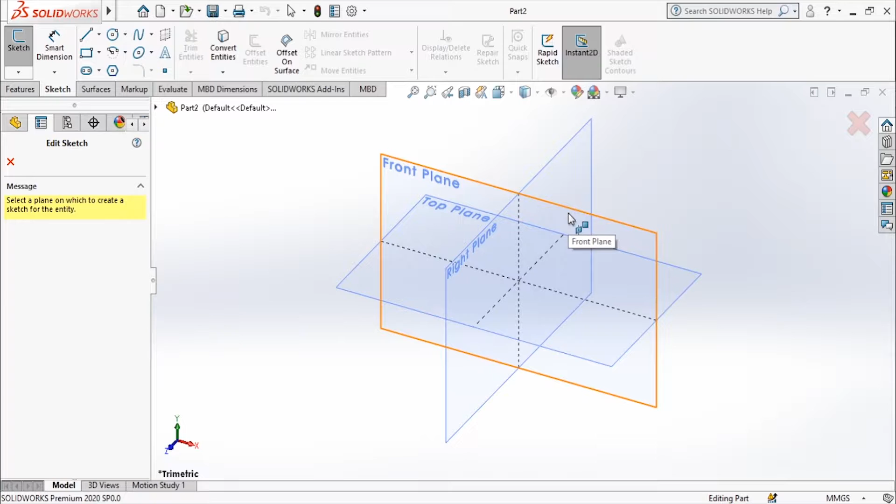Welcome back. In this video, we will see how to make this universal coupling in SolidWorks, and the drawing details are given here. And using this, we'll make an assembly in SolidWorks. So we'll go to new part, create first one sketch. First, I'm going to create on the front plane.

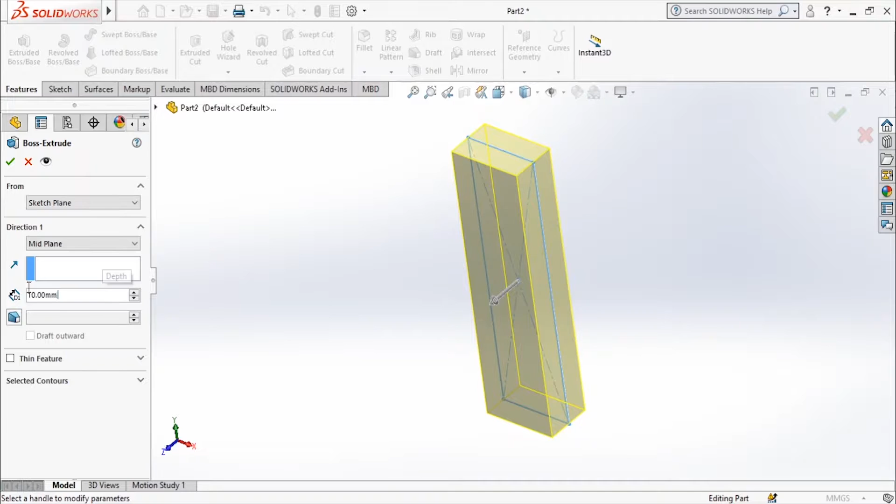First, I'm going to create this part, this center part that is 16 thickness. So first, I'm going to make a center point rectangle. Its width is 16 and its height is 57. I'll exit the sketch and I'm going to use the extrude. And I will use the mid plane. And the total distance is 84, and I'll exit from this.

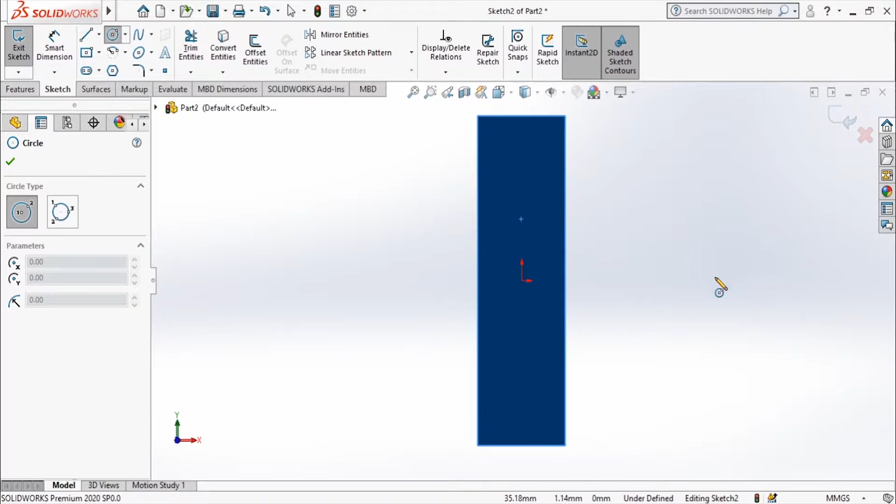And I'm going to choose this plane and I'm going to create a new sketch again. I'll make this profile and I'm going to extrude it at a distance of 84 minus 56 by 2, that is 14. So first I'm going to create a small circle. Small circle is of diameter 16 and outer circle, that is the arc, is of radius 20. I'll make the full circle itself. Later I'm going to trim it.

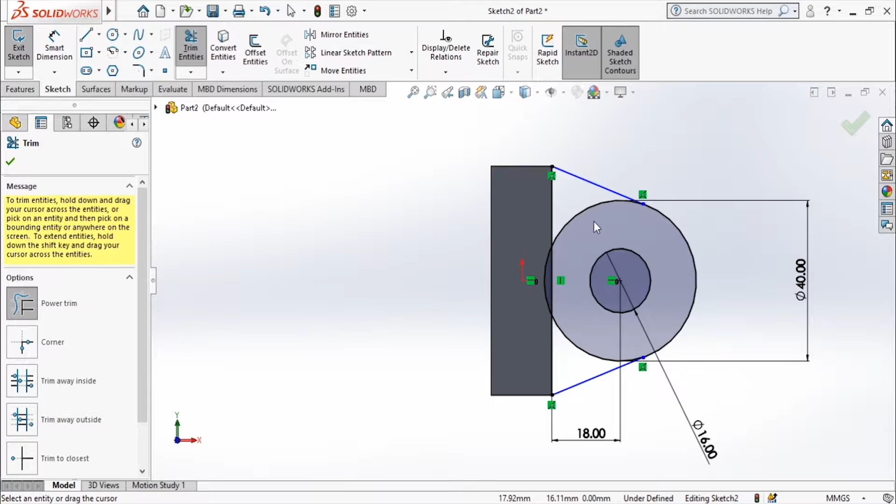It is 16 in dia and this one is 40 because radius itself is 20, and the distance from this end to this circle center is given as 18, and I'll make sure that these two are horizontal. Yeah, and now it is fully defined. I'll add the other line, that is this line, and again this, and now I'll use the trim option. I'll make sure that these two are tangent. Similarly here also.

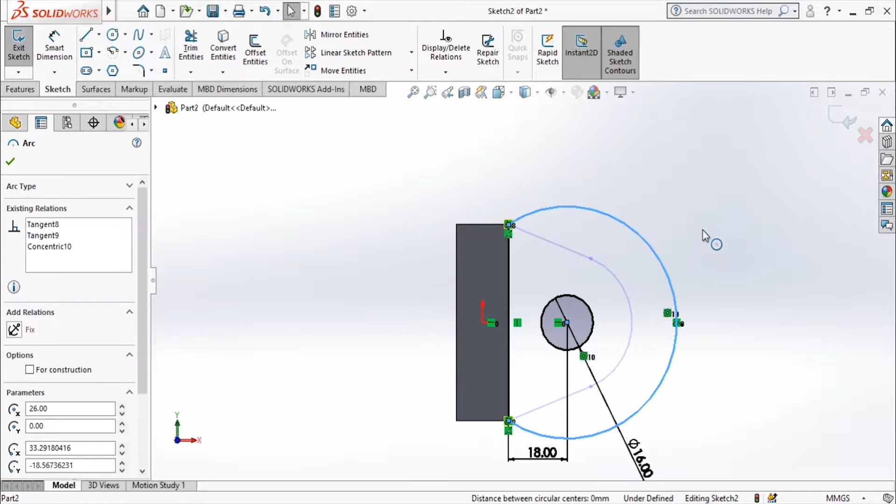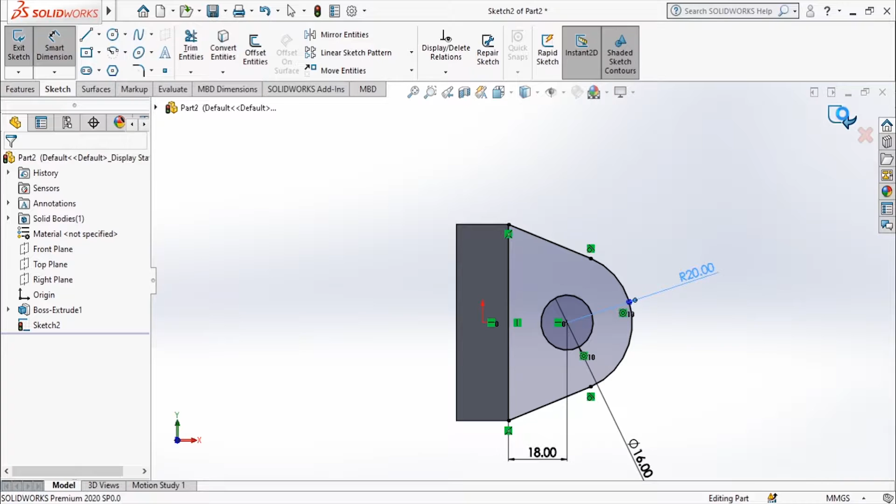And I'll add the dimension for this one. It has been deleted. This one is of radius 20. Yeah. And now it is fully defined. We'll exit the sketch and we'll extrude it. I'll extrude it in the opposite direction through a distance of 84 minus 56 by 2. We are dividing by 2, so it will be 14.

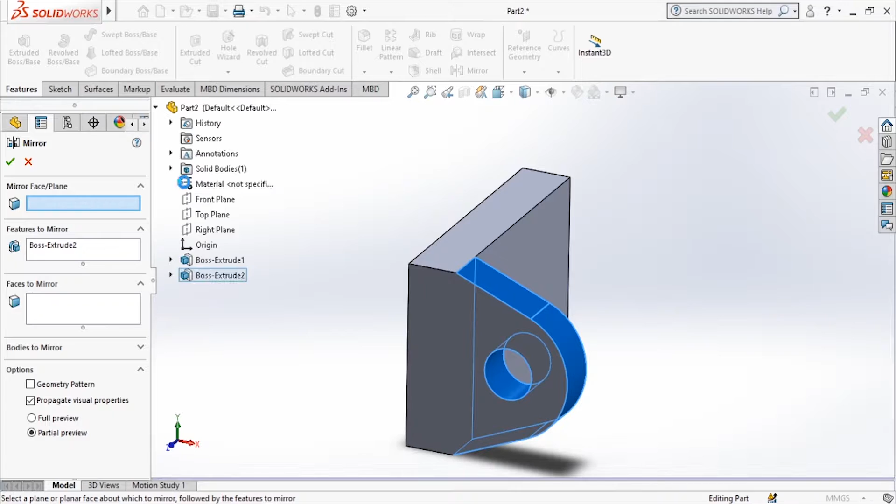And I'm going to mirror this on the other side now itself. So I'm going to choose this extrude, and I'm going to use the mirror option, and I'm going to expand this tree and choose the proper plane about which I need to mirror it. And now I'll choose this plane and I'm going to create a new sketch.

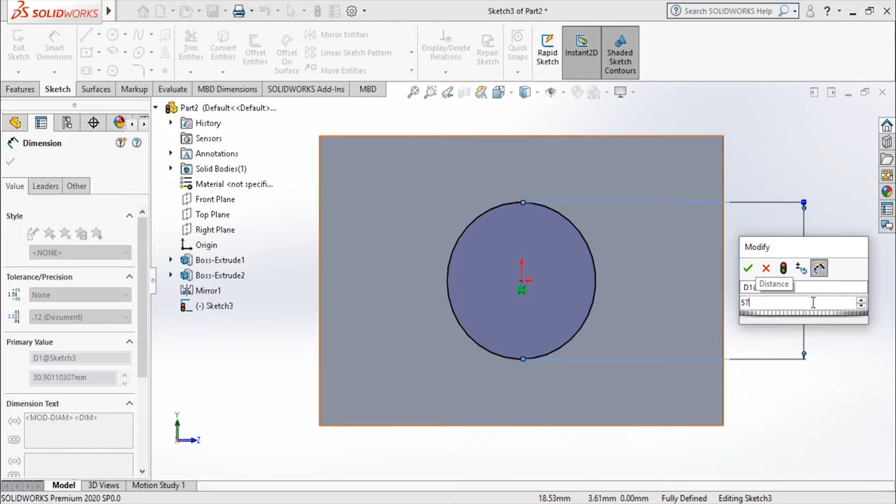First, I'm going to create only this outer circle which is of diameter 57 and extrude it at a distance of 38 mm. And later, I'm going to use the 30 mm to cut the through hole, because if I make this 30 mm and cut it, it will not be there properly, only till this surface. Again I need to draw the profile, so we'll just do only the 57 diameter circle and then extrude it, and later we'll cut it. So this is 57 fully defined, and exit the sketch, and I'll extrude it at a distance of 38.

And now I'm going to select this plane and create a sketch to create a through hole. So I'm going to draw a circle. Now the diameter is 30, and I'll exit the sketch. And now I am going to use the option extrude cut. I'm going to cut through all. You can see through all now.

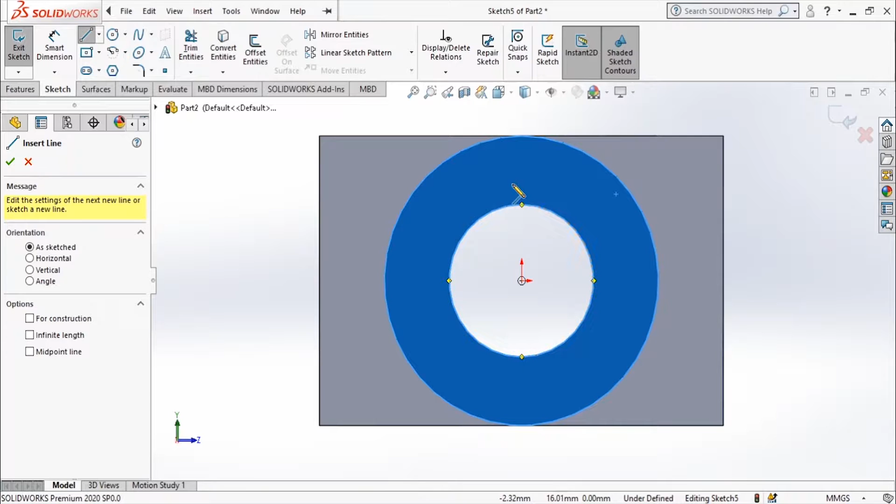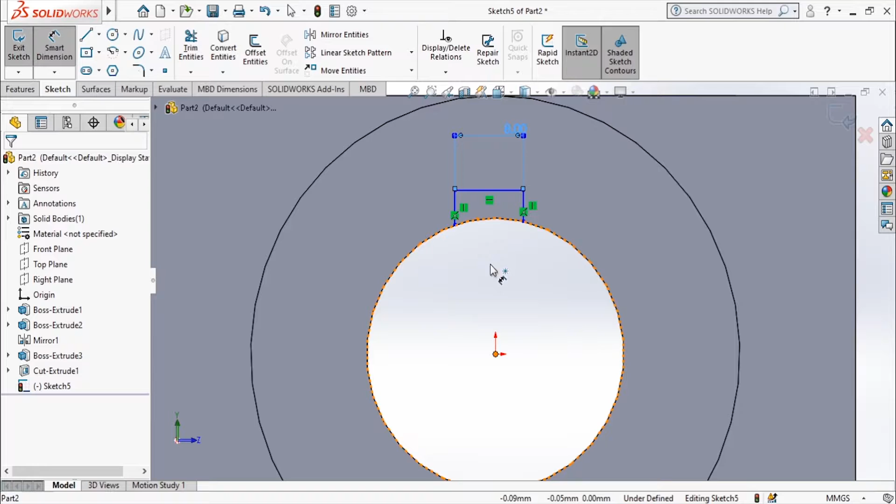And now I'm going to provide a keyway hole which is of 8 into 3.5. So I'm going to choose this plane and create a new sketch again. I'm going to use the line tool itself. And I'll add the dimensions for this one now. This one is 8 mm. The height is 3.5. But I need to make sure that these two are equal. So it is 4.

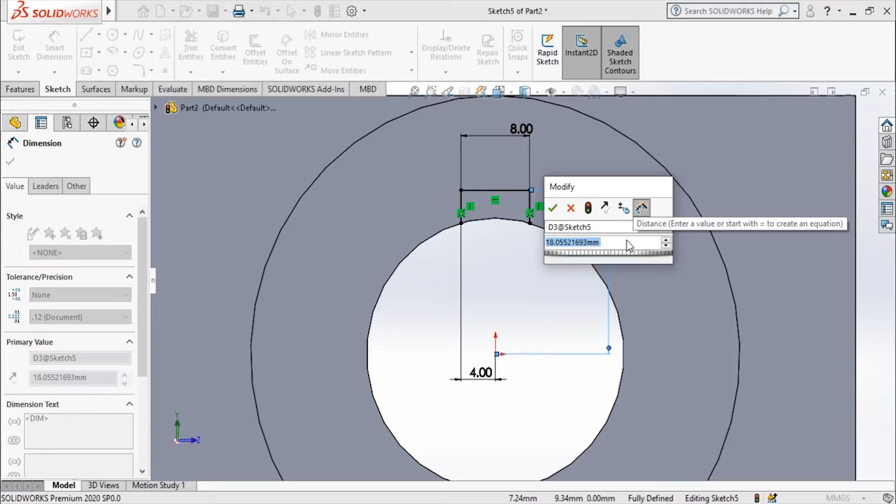So this height will be the radius of the circle plus 3.5. So radius of the inner circle is 15, since the diameter is 30. So 15 plus 3.5, that is 18.5. Okay, and now it is fully defined. It is not a closed profile, so we need to project this circle. So I'm going to use the convert entities. Yeah, and now it's projected, and now I'll trim this excess one.

And the profile is a closed profile, and I will exit the sketching mode, and I'm going to use the extrude cut again, but here also I'm going to use through all. And now you can see the keyway has been made, and we are done with the fork. Next one we'll go with the center. We will save this part.

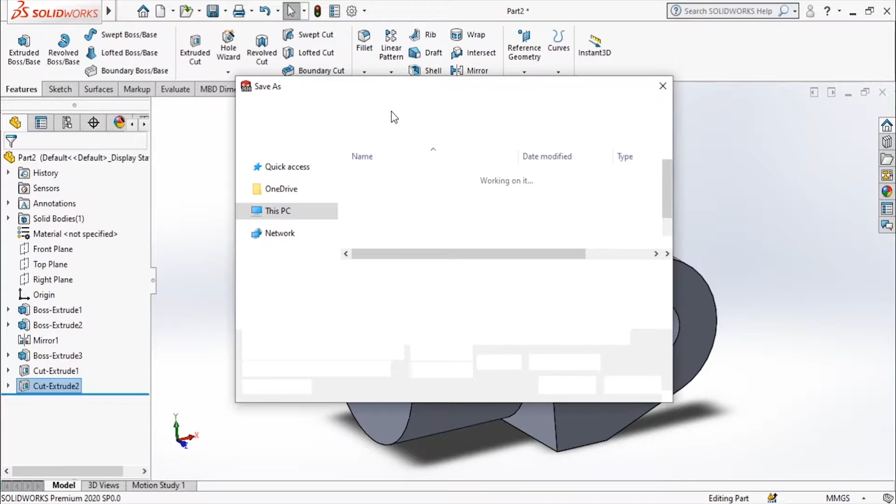I'm going to save this part as fork. Remember to give the part name properly while saving, because the same name will be appearing in the bill of materials.

And now we'll add the material to it. We'll go to material here and edit material. For this one, it is given as cast steel. So we'll search. Yeah, we'll use this one itself because they have not specified exactly which one. And now we'll close this one and we'll create a new part again.

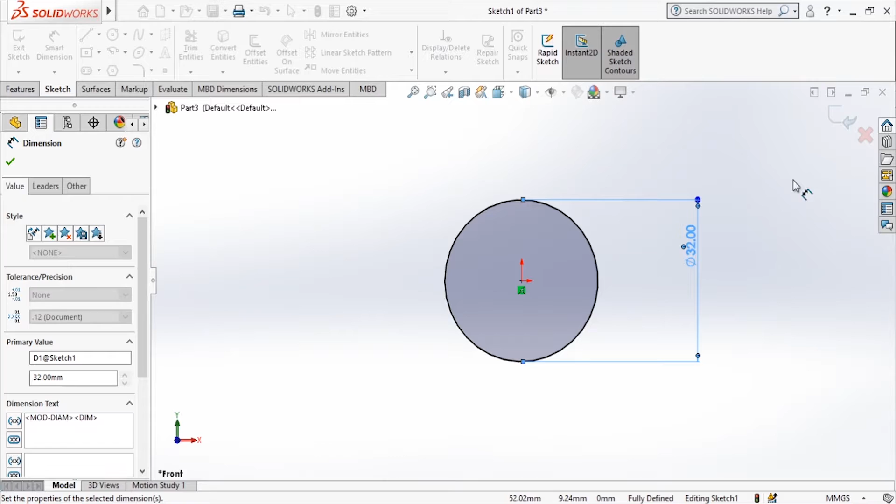And now we'll be going to make the center, that is the second part. So first I'm going to create a sketch, select the plane, and I'm going to make one circle. The outer diameter is given as 32 and the inner is 16. Now I'm going to make only the outer one. So diameter is 32. I'm going to exit from the sketch.

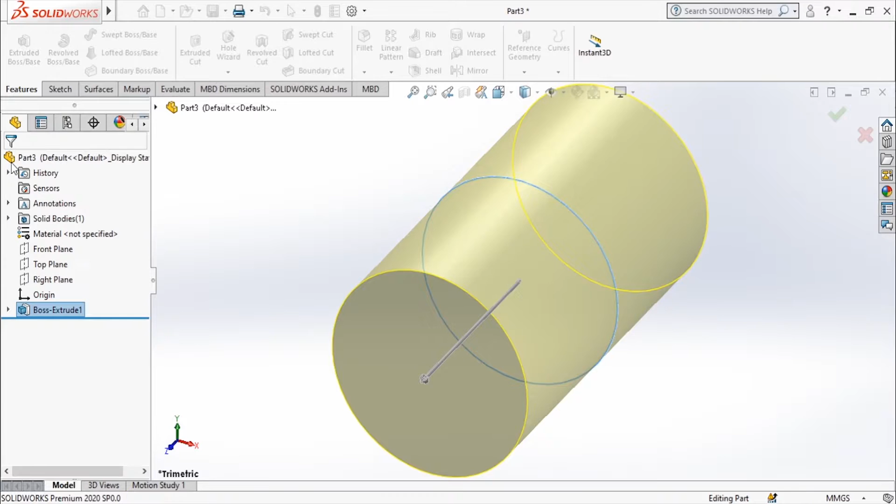Features, extrude. I'm going to use the mid plane. I'm going to extrude it at a distance of 56. And I'm going to choose this right plane and create a sketch. Now I'm going to make another circle of the same dia. It is also of same dia, that is 32.

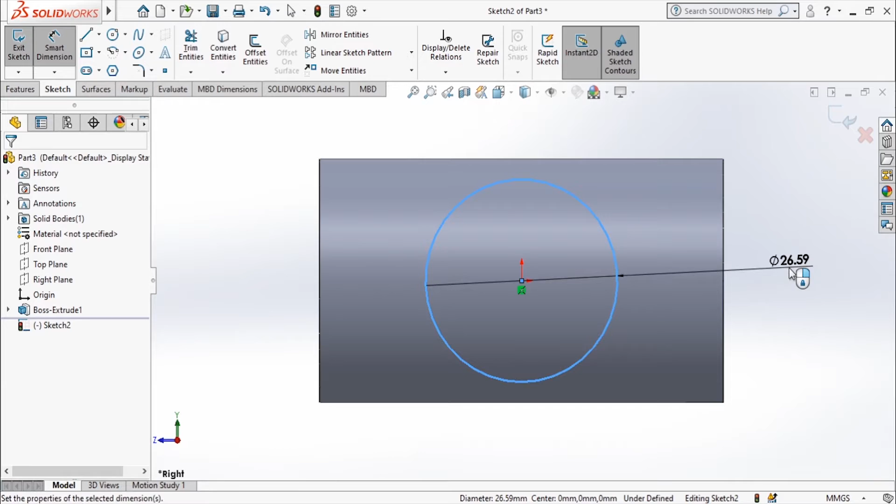So I'll exit the sketch, extrude it. I'm going to extrude from there at a distance of 56. Here also I should get the mid plane and 56, yes.

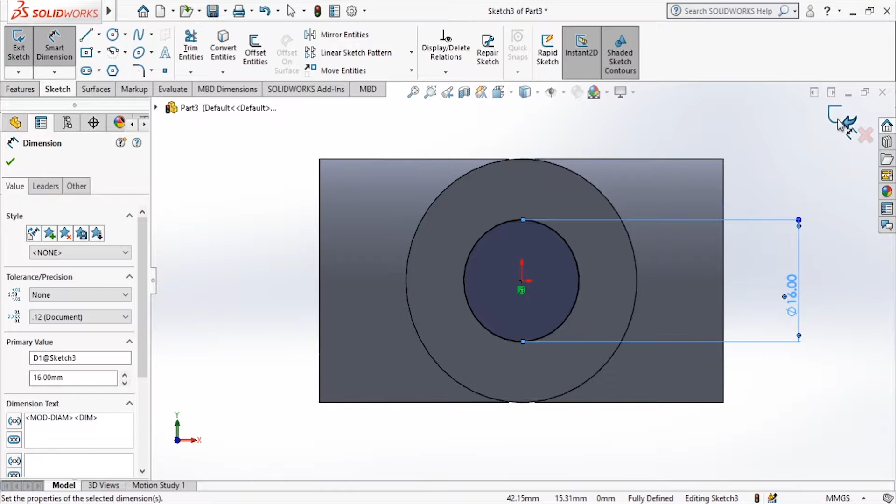And now I'm going to create another sketch to make a through hole. Now the inner diameter I'm going to specify as 16. I want 16 in the drawing, and exit the sketch and extrude it. Sorry, extrude cut, through all. Similarly for this face also.

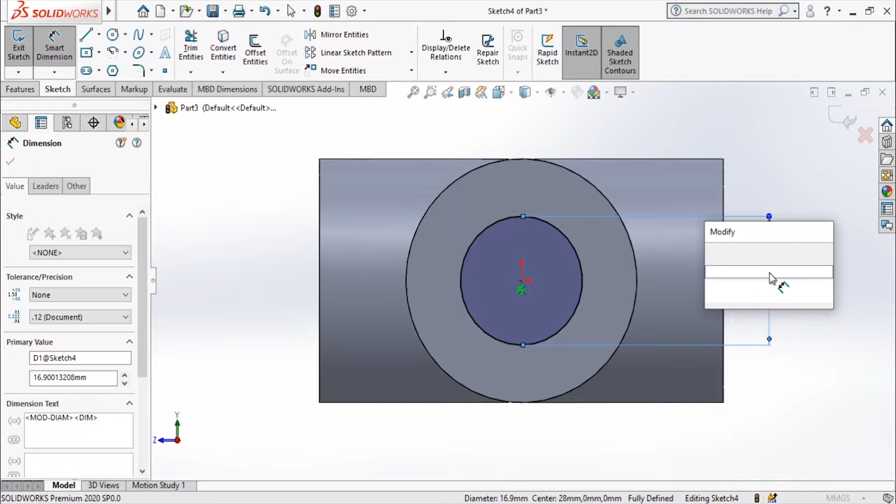I can see. And it is made up of CI, that is cast iron. So I'm going to change the material. I'll search for cast iron and we'll choose this one. And now we are going to save this part as Centre.

And now we'll be making the shaft. The shaft diameter is 30. The length can be anything because we are giving the shaft just for the presentation. And there is a chamfer over here, and it should be a little longer than 38 plus 16 mm.

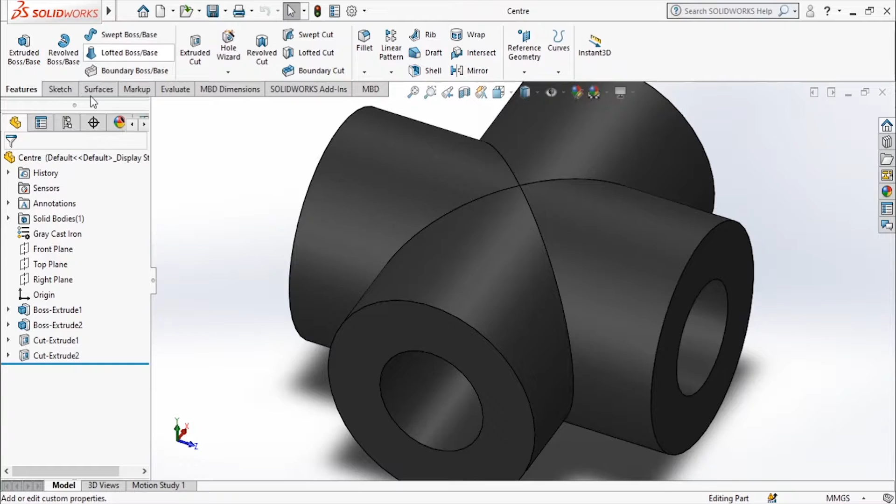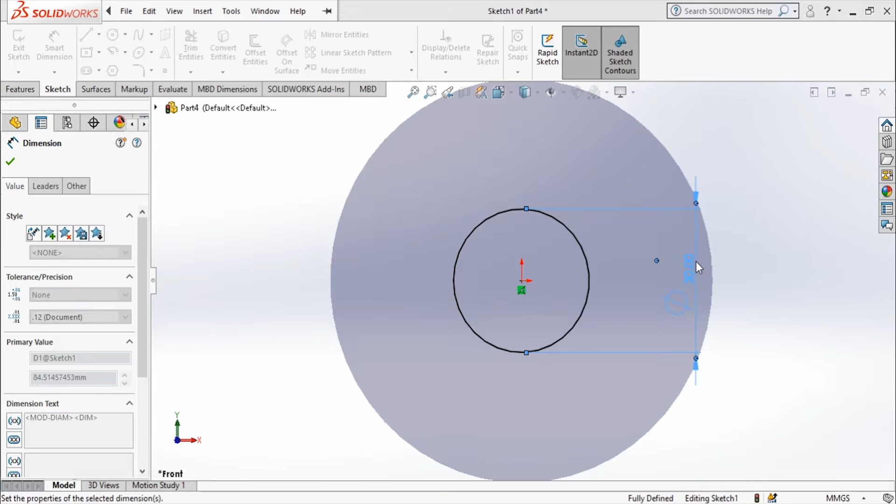So here they have made a chamfer, and here the length of the keyway is specified. Okay, so the shaft diameter is 36. Sorry, the shaft diameter is 30. So I'm going to extrude it at a distance of say 90 mm.

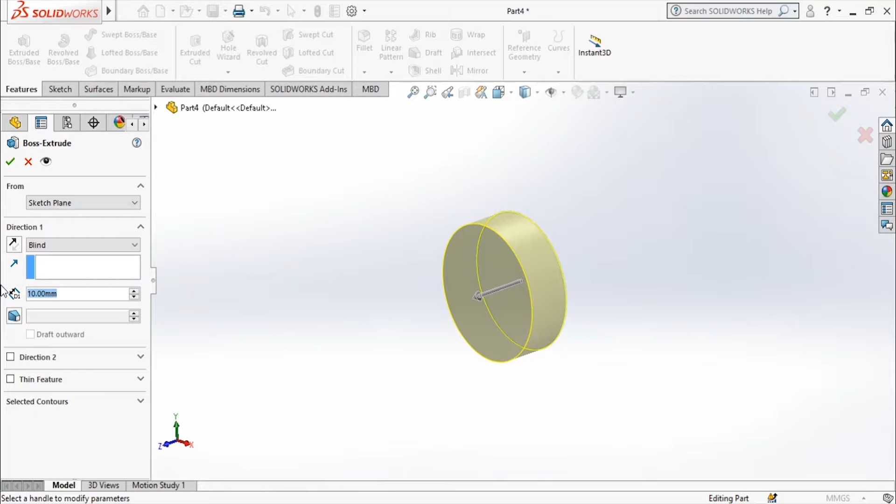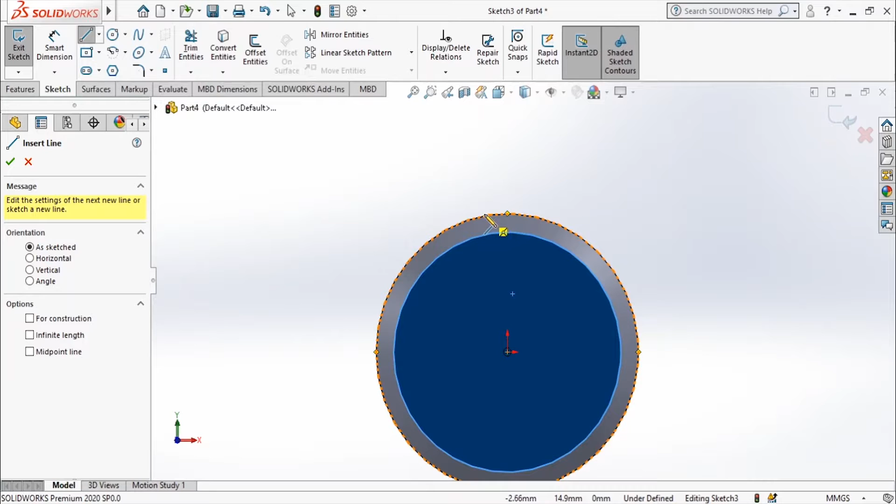So I'm going to create a chamfer. The chamfer is 2 into 45 degree. Okay, and then click on OK. I'll select this face and create a sketch again, similar to how I created the keyway hole in the fork. Here also I need to create it the same way. I'm going to use the line tool

and the distance from this to this top is given, that is 26. The diameter is 30, so half of it will be 15, so 26 minus 15 will be the distance, that is 11 from this center to this bottom line.

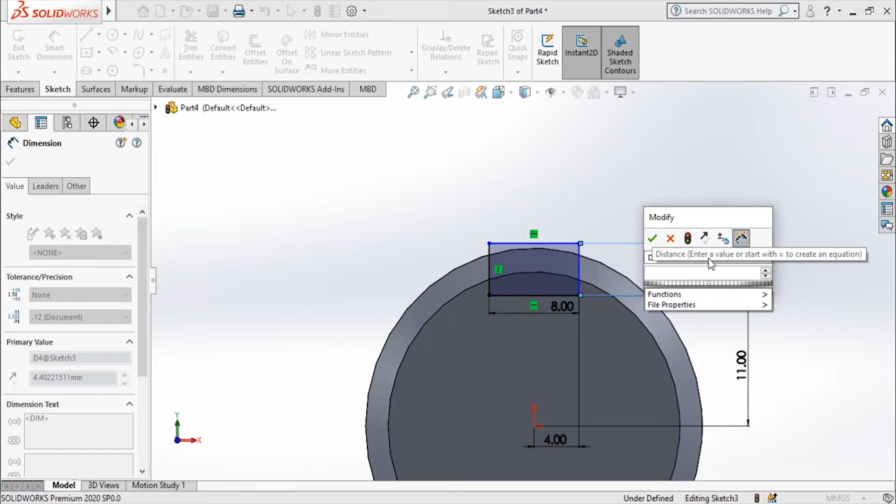Okay, this height you can leave as it is because it should be a closed profile. You can make that one as a circle also, but you can leave it because it is not going to affect anything. I'm going to make that one vertical, and it is fully defined, and I'm going to exit the sketch,

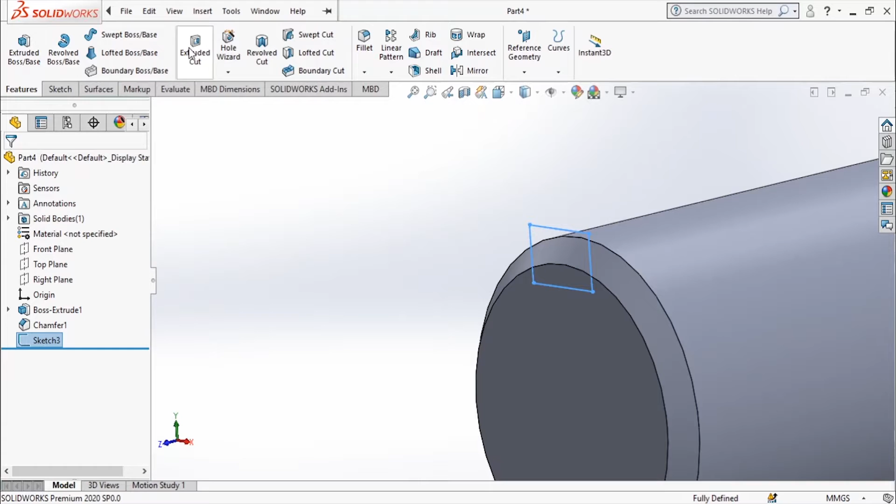and from here I'm going to use the extrude cut. The keyway length is 60 from this end, so it is 60. Yeah, and you can see the keyway hole has been made. And I'm going to add the material to it. The shaft material is given as Fe410W.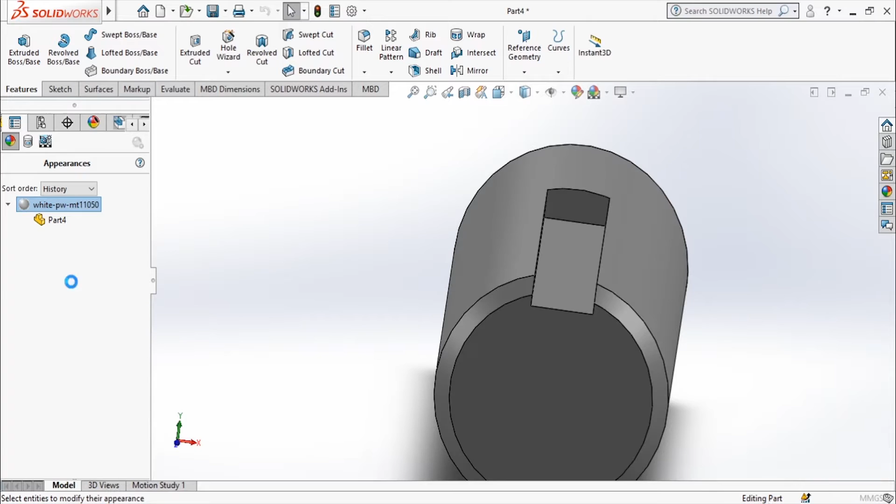Since this is a custom material not available in the default SolidWorks material library, you need to create your own. In the previous videos, I've shown how to create the custom material. And I'm going to save this one as shaft.

And now we are going to create a key that is also made of the same material, and it's very easy. I'm going to make a rectangle of 8 into 7 and I'm going to extrude it. It is very simple.

Now I'll extrude it. The length is 56, and the material is the same, Fe410W, that is, it is made of shaft material only.

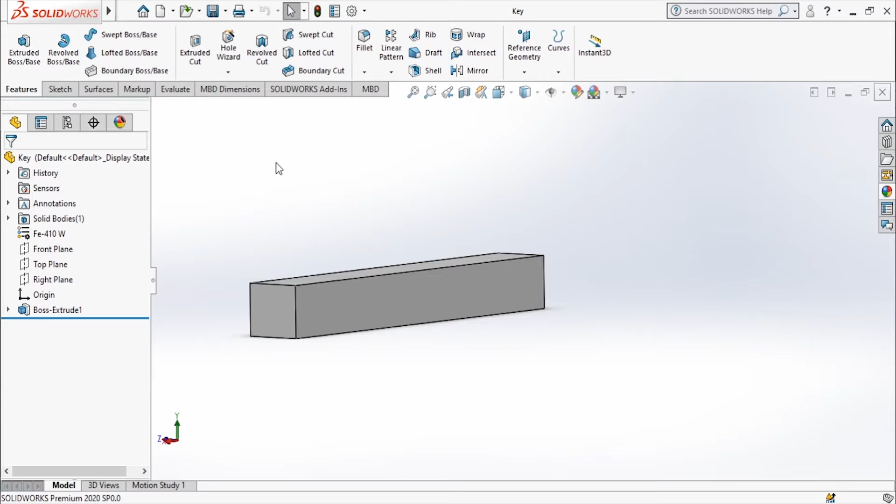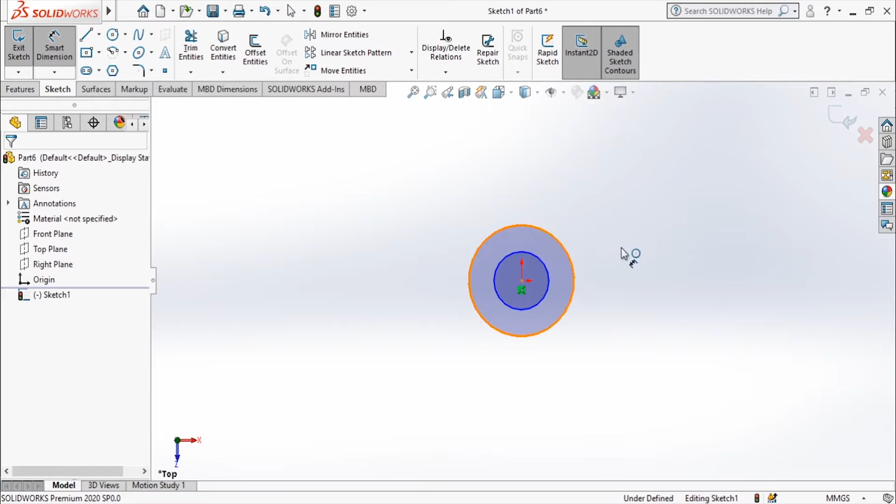And now we'll make this collar, which is very easy. So we need to make a circle of outer diameter 25 and inner diameter 16, and in the center there is a 3 through hole. So we'll go to sketch. Outer is 25, inner is 16. So outer is 25. I'm going to extrude it at a distance of 10 mm.

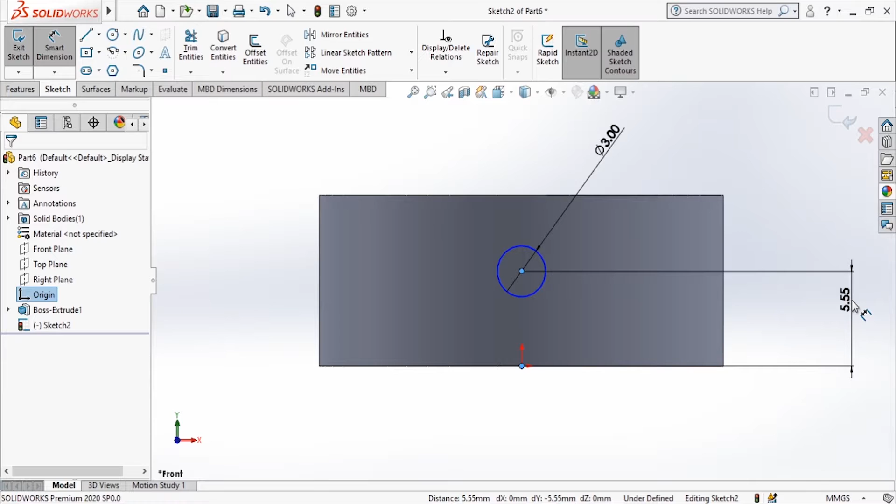They mentioned it as 3 mm. Actually, since the taper pin goes inside, one end should have a different diameter and the other end should have the other diameter. They have not specified that it is a taper hole over here, so I'm going to just make a 3 through hole. It is 5, and I'm going to make sure that these two are vertical. And now it is fully constrained and we'll exit from the sketch.

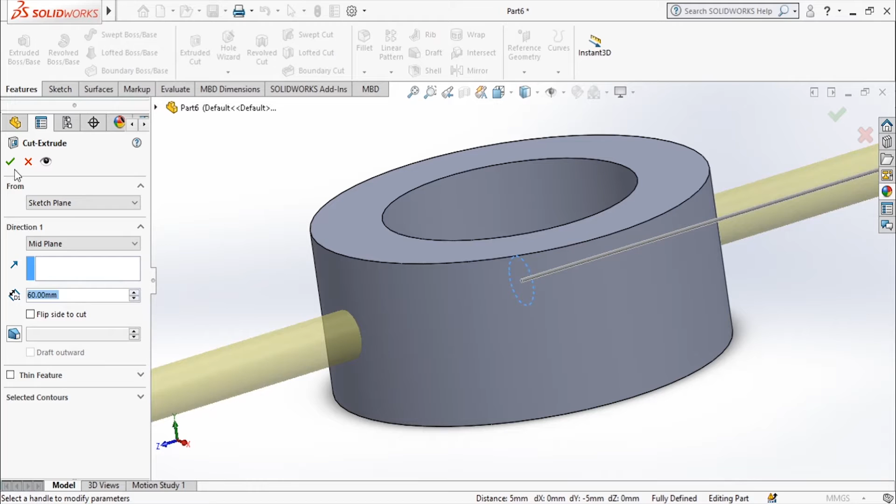Make an extrude cut and we'll go with the mid plane and we'll cut through all, and add the material to it. The collar is made of Fe410W again. Search, apply, close, and we're going to save this one as collar.

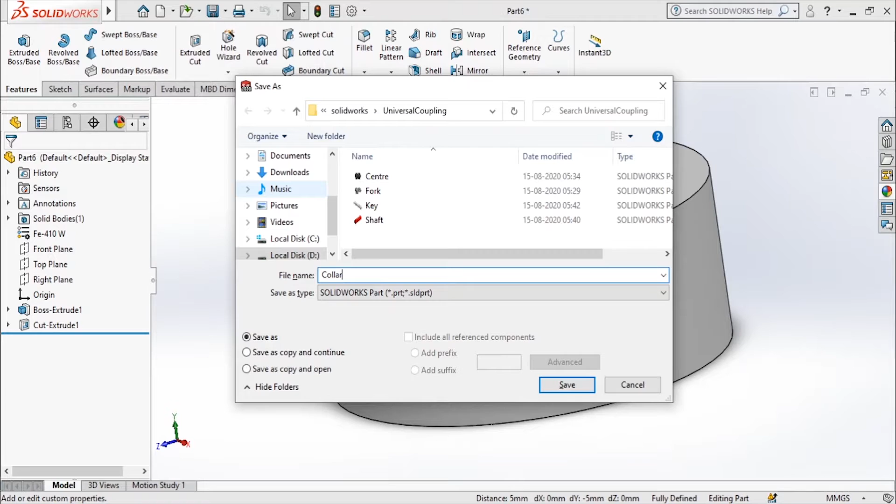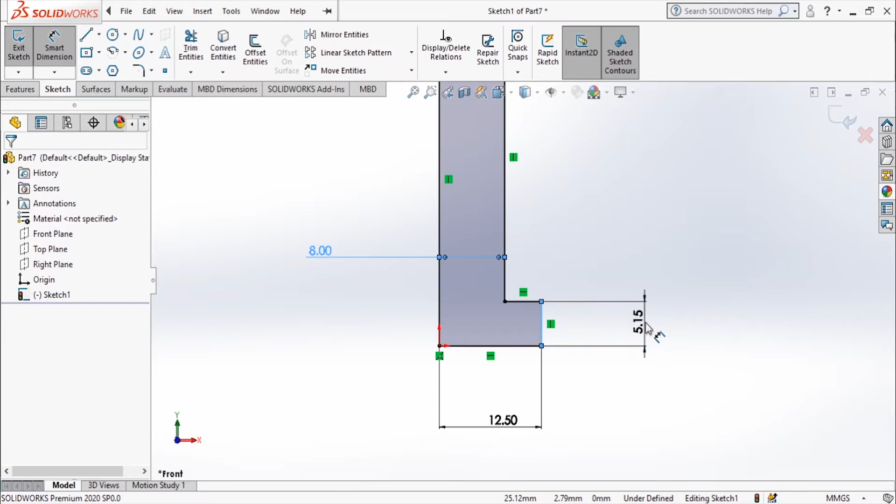And now I'm going to make the pin. So I'm going to use the revolve option over here. First, I'll make a random profile, that is without using any dimensions. Now I'll add the dimensions. Since we are going to use the revolve, I'm going to draw only the half. So this diameter is 25, since it's half, it will be 25 by 2. And this height is 9 and this diameter is 16. 16 half is 8. And from this to this height they are given as 96.

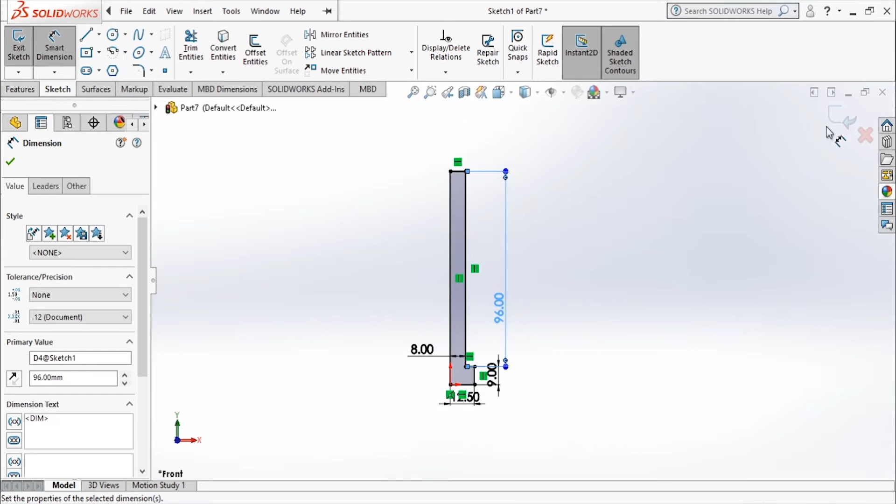Now we'll use the revolve option. I have chosen this as the axis line and I'm going to rotate it 360 degrees. And now I'm going to choose front plane or right plane. Either one is fine because it's a circular profile. I'm going to create a sketch and make a hole for the taper pin to go here. Here also they have not specified it as a taper hole. Actually, it should be a taper hole, but they have not specified it in the drawing. So we'll make it just a simple 3 mm through hole, because the taper pin has different diameters at both ends.

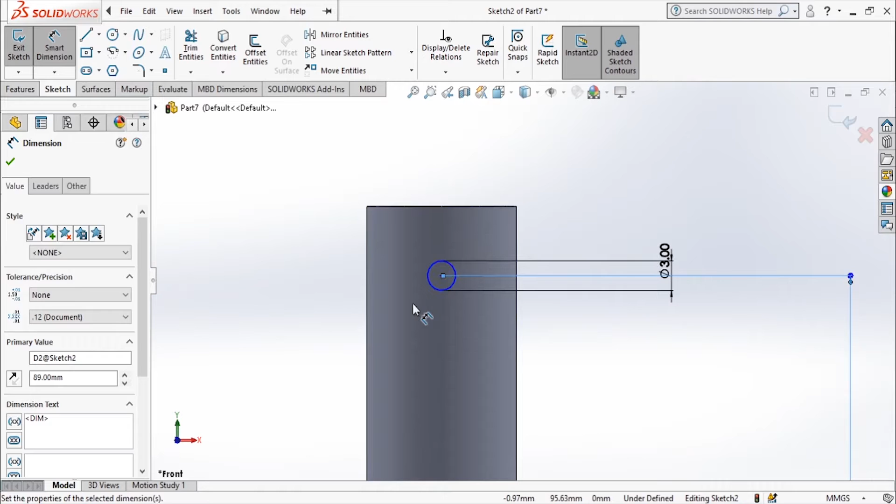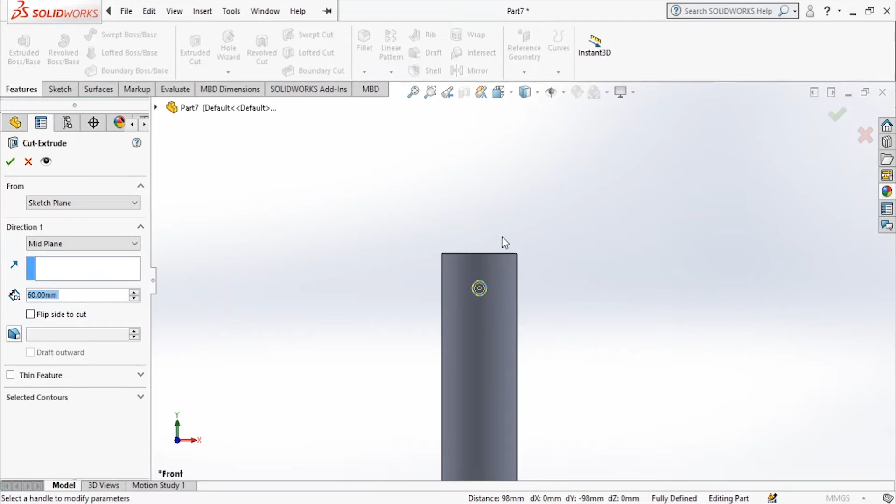And the center of this 3 mm hole is at 89 mm from this base. So I'm going to provide 89 from here till here. And I'm going to make sure that these 2 points are vertical. And now it is fully defined. I'll exit the sketch, and again I'm going to use the extrude cut with through all, mid plane, and now we are done.

And the pin is also made of Fe410W. We'll add the material to it. If you're using the same material again and again, you can add it to your favorites and just apply it easily.

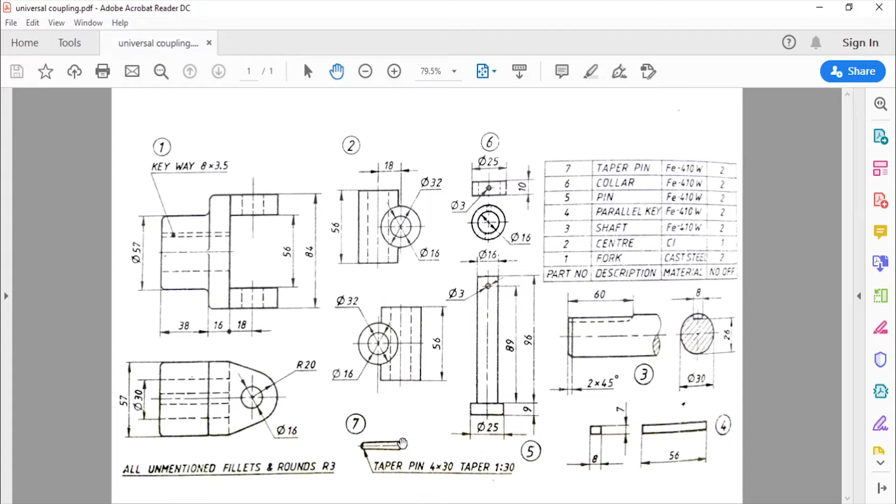And now I'm going to make the taper pin. For the taper pin they have given diameter 4 into 30, that is, the length is 30 and the diameter is 4 mm, and the taper ratio is 1 is to 30. So we need to calculate it. After calculating, we get that the bigger diameter is 4 mm and the smaller diameter is 2 mm. So I'm going to create a sketch.

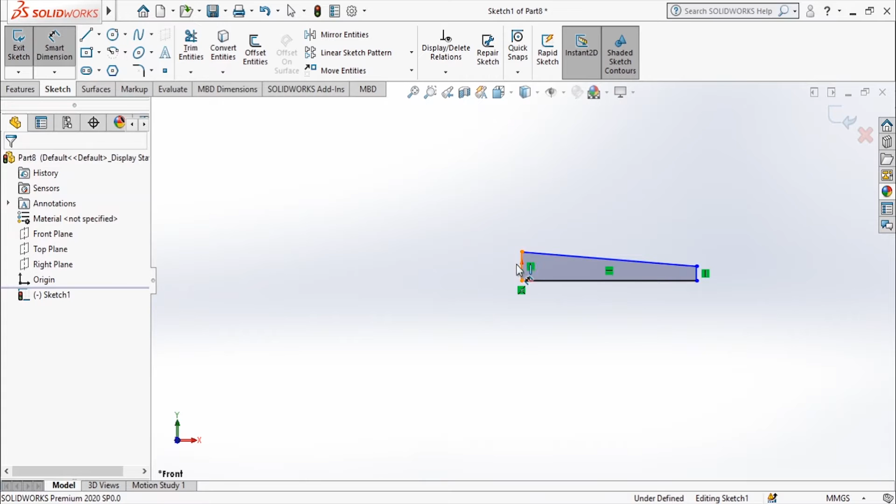I'm going to make only the half, so the bigger diameter is 4, so the radius will be 2. For this one, the diameter is 2, so the radius will be 1. And this length they have given as 40. Okay, the length is 30, not 40. We'll exit the sketch, go to features and use the revolve option, and I'm going to choose this straight axis line, and I'm going to apply the material. This one is also the same material, Fe410W. Save this one as taper pin.

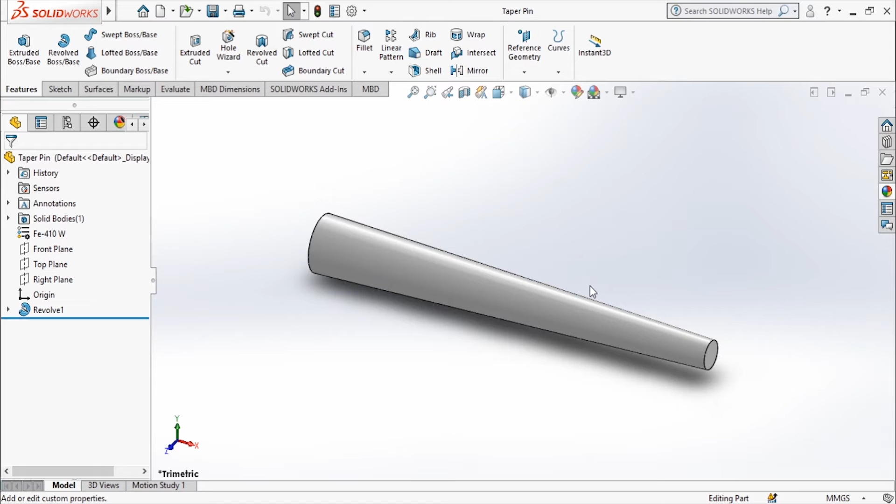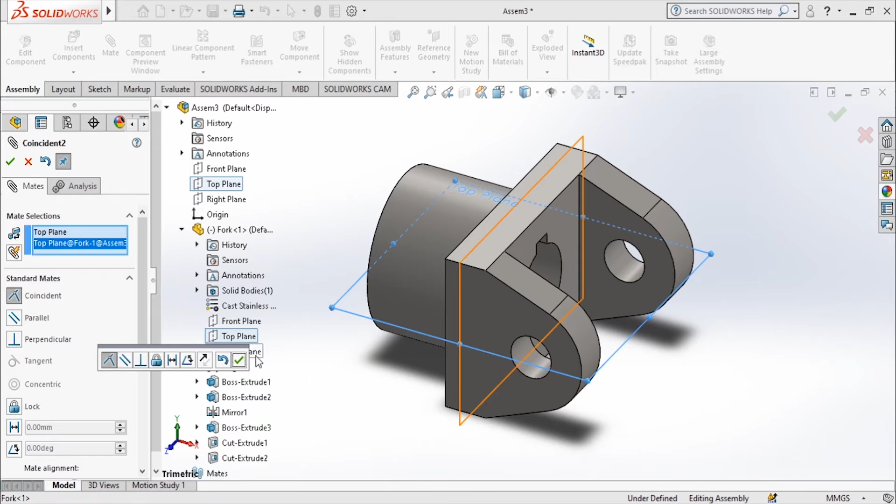Okay, now after creating all the parts, we'll go to the assembly and create an assembly of all the parts we have created for the universal coupling. First I'm going to bring only one fork. Actually we need two forks, but first we'll start with one fork. Right click and we'll enable it to float so that it moves. Now I'll go to the mate option to constrain it, and I'll make sure the front plane of this one and the front plane of the fork coincide, and similarly for the top plane and for the right plane as well.

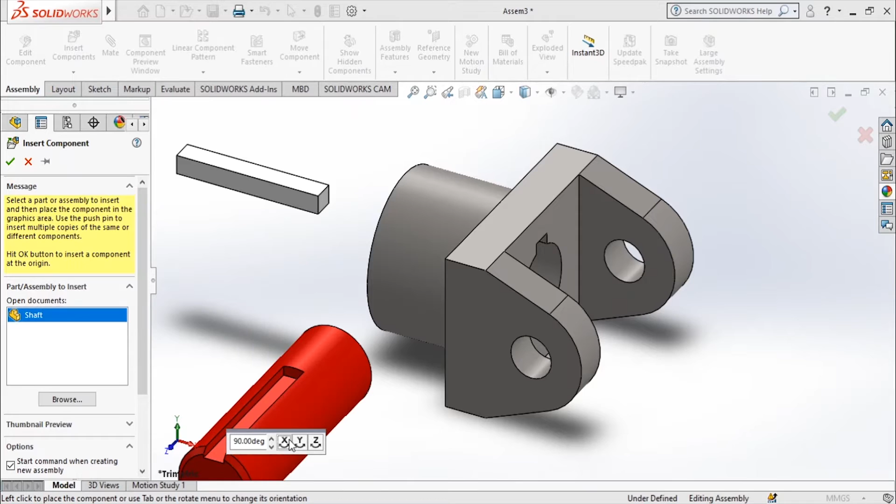And now I'm going to insert the component. First I'm going to insert the shaft and the key, and I'll just make sure that I find out the exact dimension, which one is 7 and which one is 8 mm.

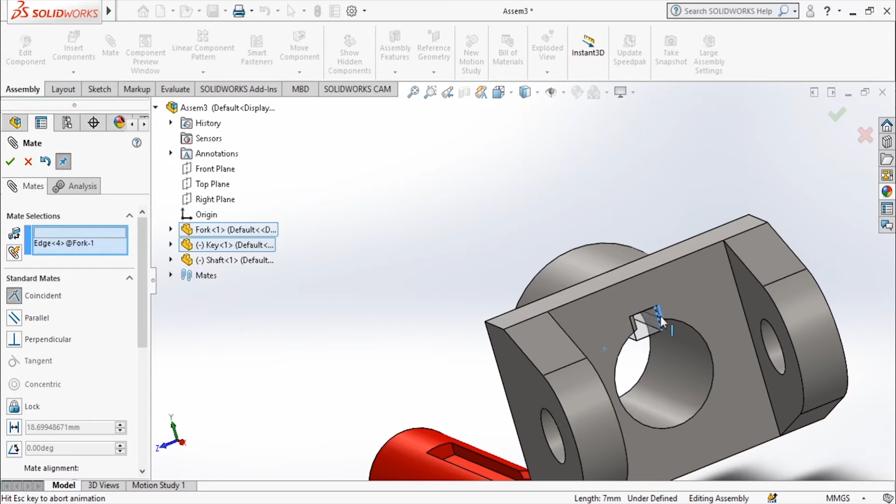Okay, and it is properly there. So now we'll go to the assembly tab. Again I'll just go to the mate, and now we'll use the concentric.

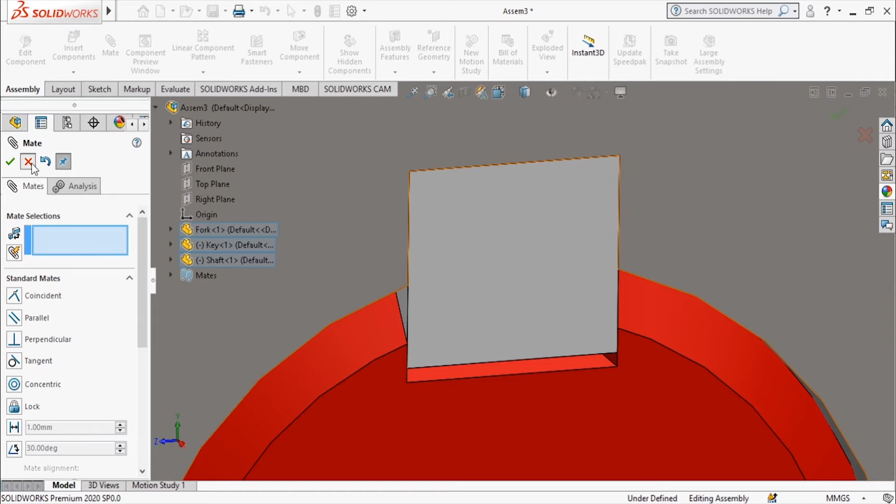And we'll see that the shaft rotates, so I don't want the shaft to rotate. I will just fix the shaft by right clicking on this, and I'll just enable it to fix so that it does not move now.

And actually you can see that extra keyway is there, and that is because it should not go inside here. That's okay, if you want you can just leave it.

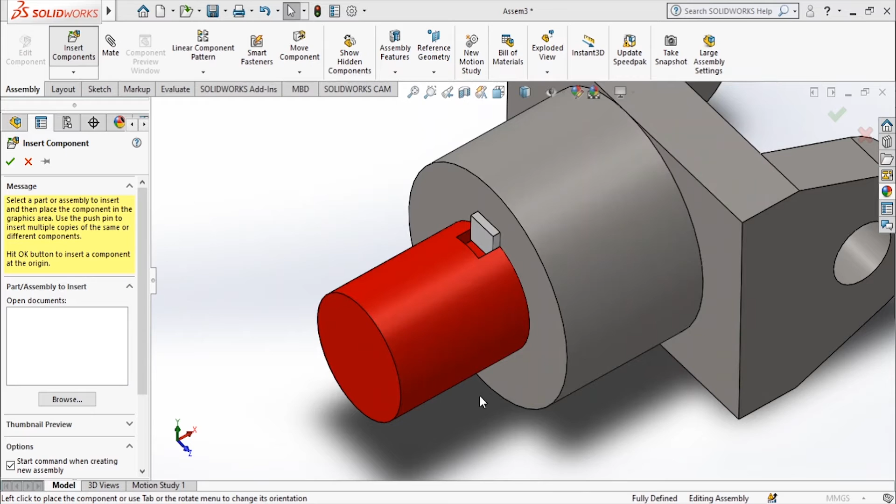And now we'll go and add the other components. First we'll add the center. I'm going to rotate here itself, and I'm going to place it here, and again I'm going to add one more fork. Now I'm going to use the rotate.

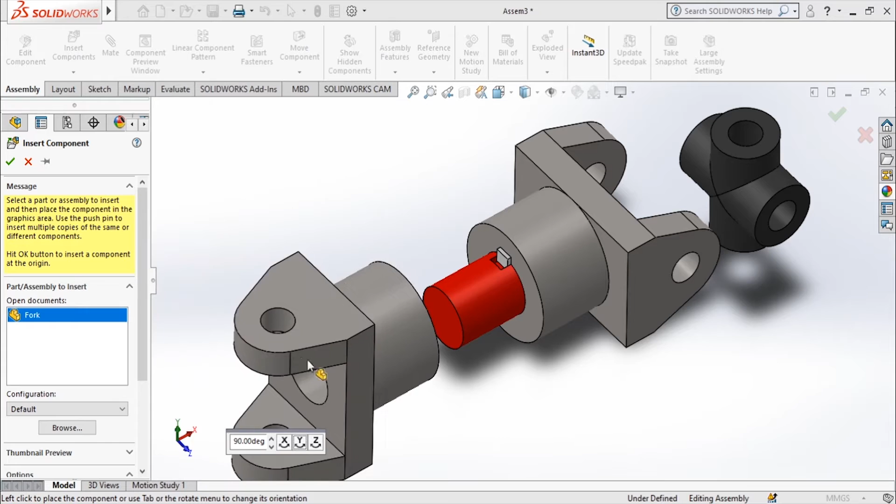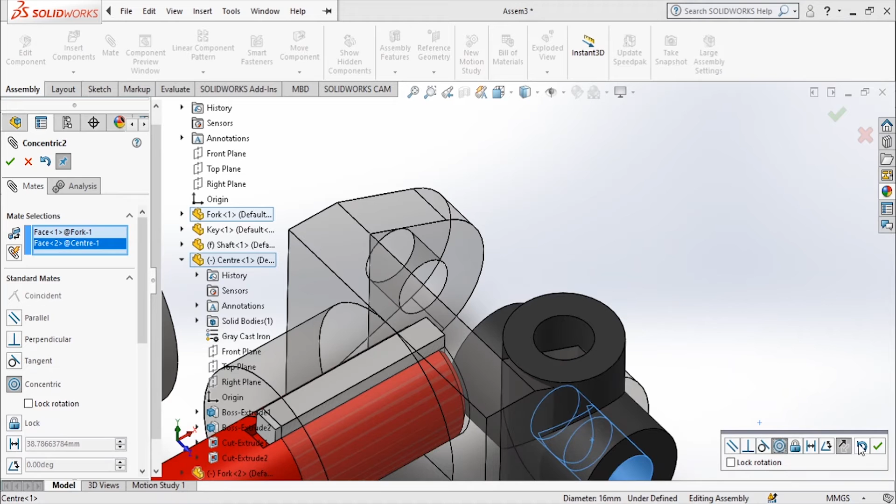And I'll add the constraints by going to mate. First I'll make sure that the center, right plane and this top plane are coincident so that it does not rotate. And now I'll make sure that these two are concentric, and I will add the coincident constraint. And now I will add for this the other fork as well.

And you can see that this is free to move, and this is because of what is the purpose of the universal coupling itself, and it should be free to move.

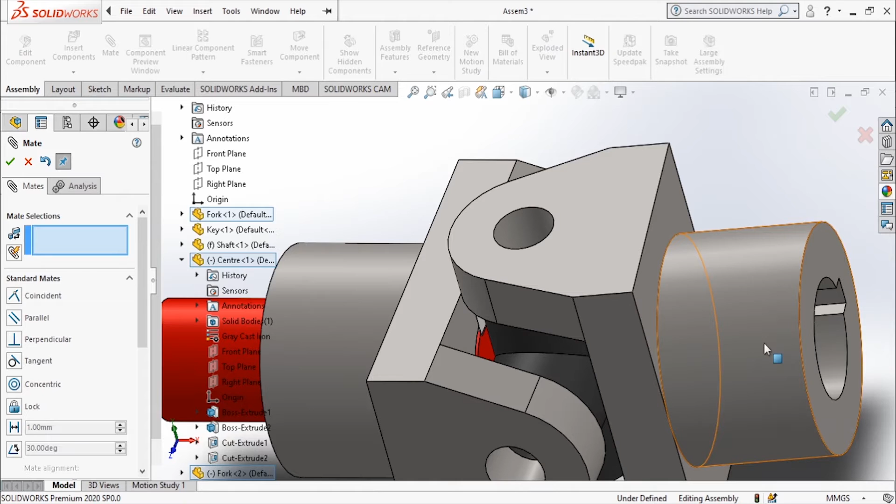And now I will add, actually it should have only a specific angle. Now you can just leave it, or you can just add one more constraint so that it is straight.

So I'm going to clear this front plane, and I'm going to choose the fork two's top plane, and now you can see this is proper.

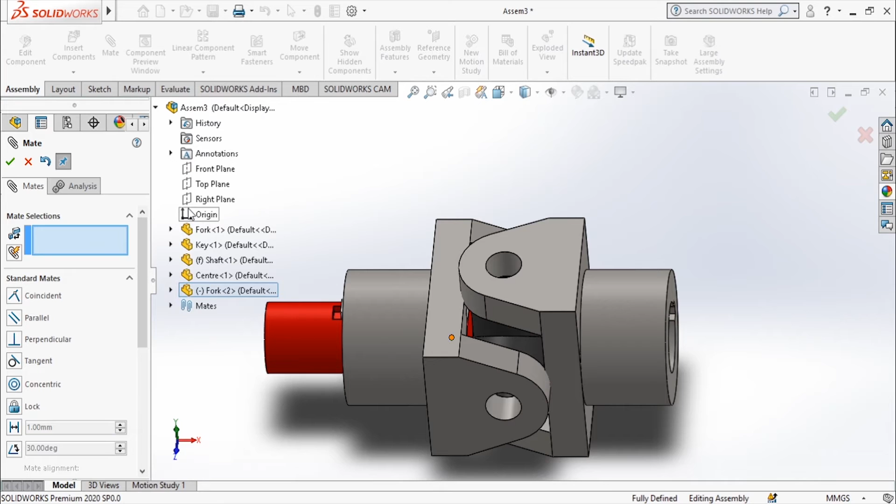And now I'm going to insert component, and now I'm going to bring the shaft and the key first. Shaft is there, and I'm going, sorry, the key, and this is the shaft.

First, I'm going to measure this key, so I'm going to ensure that whichever face it is, that is properly there. So okay, this is 8 mm.

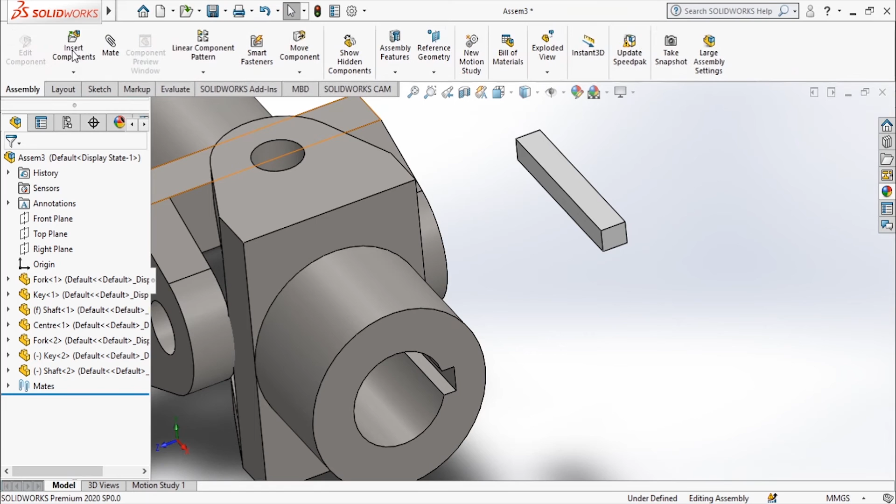So I'm going to assembly mate. Make sure that these two are concentric, yeah, and these two.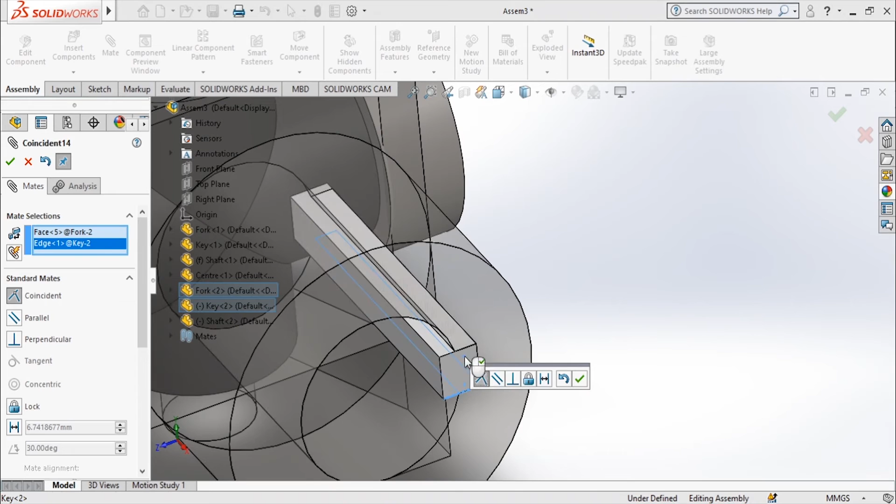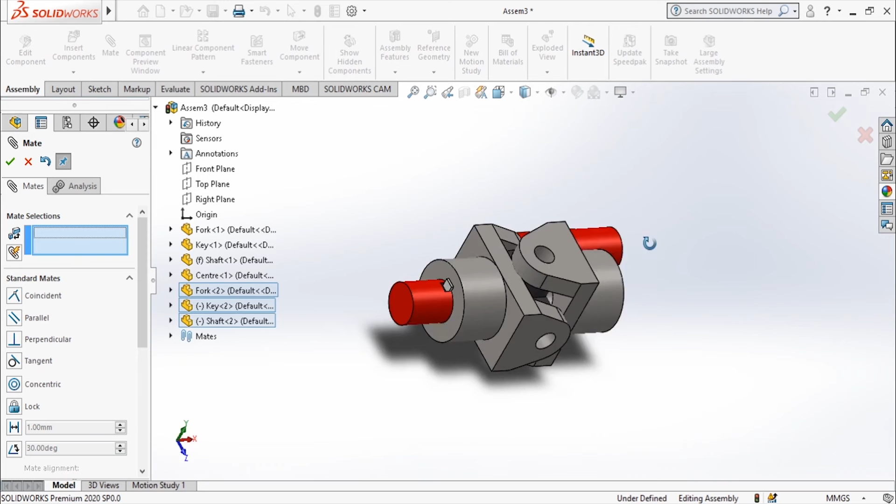Okay, and now I'll add the shaft, and I'm going to flip it, and make sure that these two are again coincident, and this one as well.

And similarly, for what I've done for the other shaft, this one also I'm going to make it as fixed so that it does not move. And now we are going to add the other components.

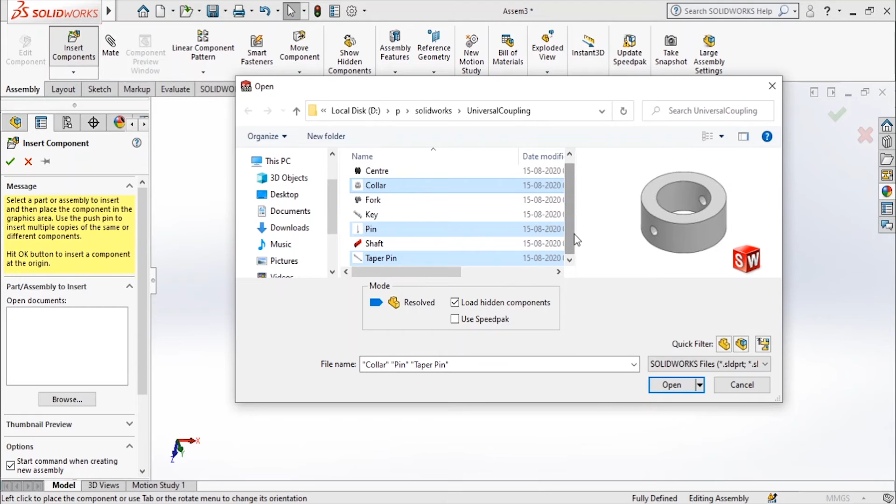First, I'm going to add this pin, taper pin, collar, and that's it. We are going to need each of these components too. Okay, and we are going to need one more set of pin, collar, and taper pin. First we are going to assemble this, and later we are going to bring in the other components also.

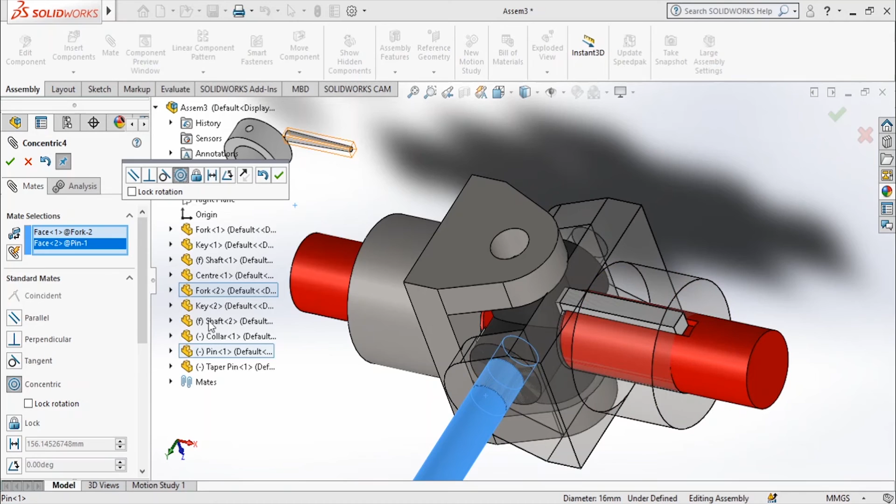Actually the collar has gone inside, so I'm going to hide this fork too. So I'm going to use the mate option now itself.

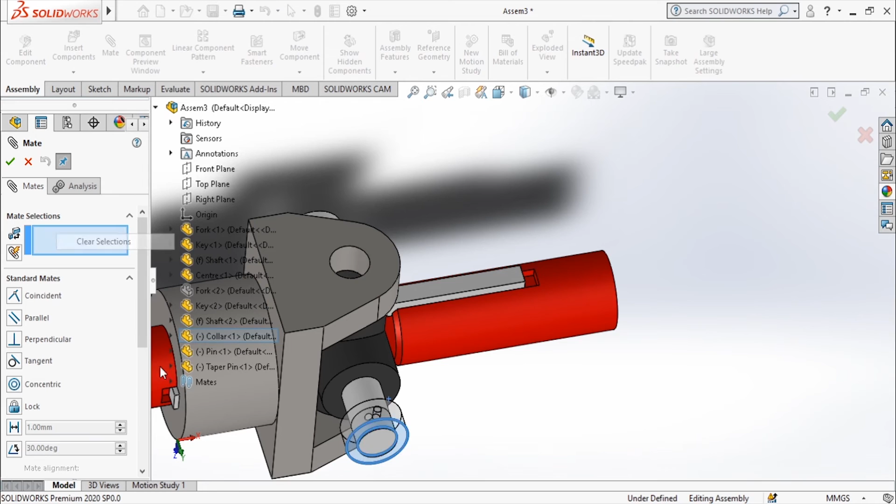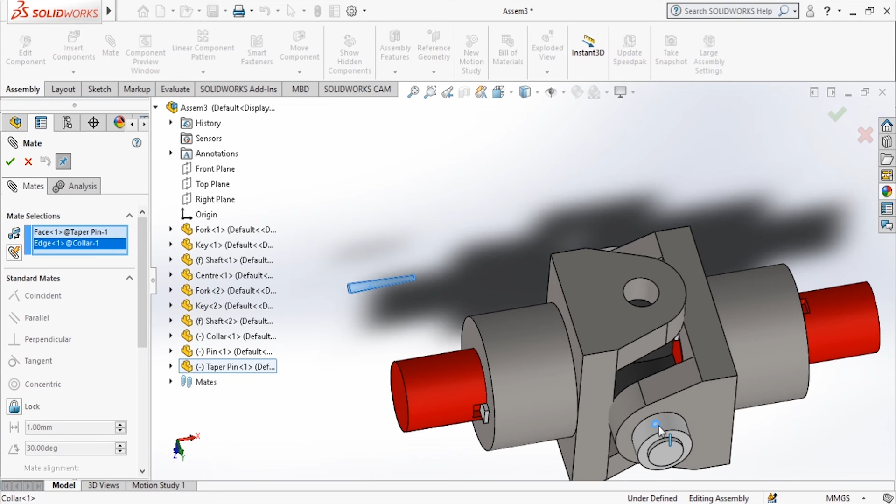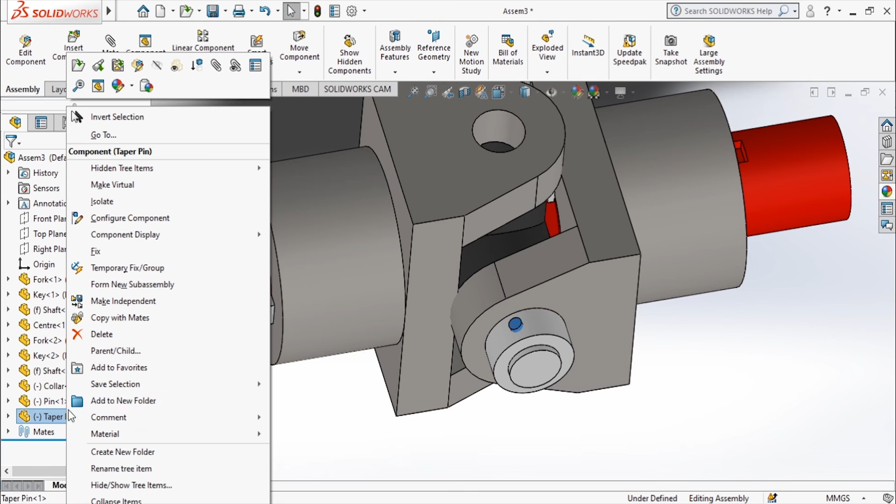And I'm going to unhide it again. And again I'm going to fix this taper pin, because it should not move.

And now again I'm going to add one more set of collar, taper pin and as well as the pin. So for that first I'm going to insert the components and bring back the components again. Pin, taper pin and the collar.

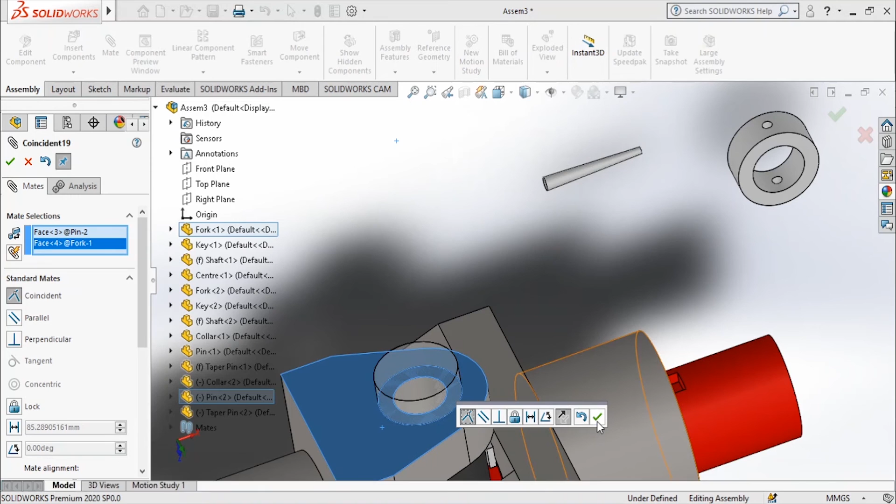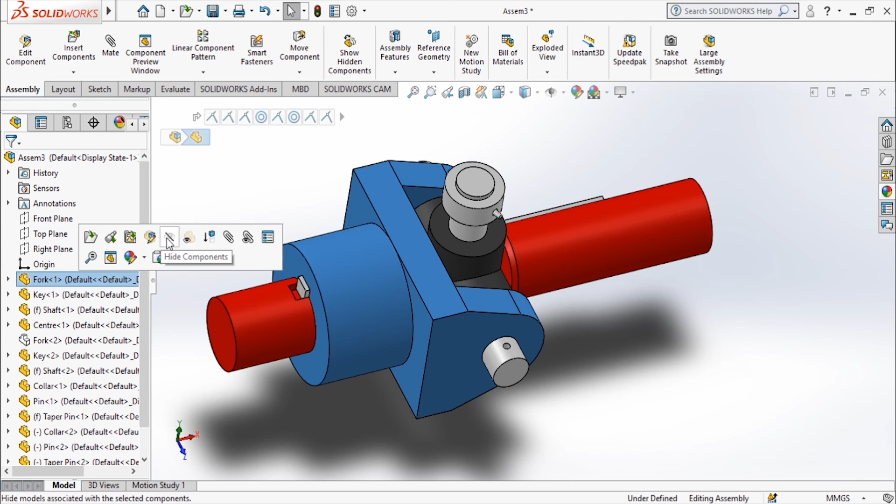And now I'm going to mate again to add the mates. And again it is hidden, so I'm going to hide now the fork one. Fork one is here. I'm going to hide the center as well.

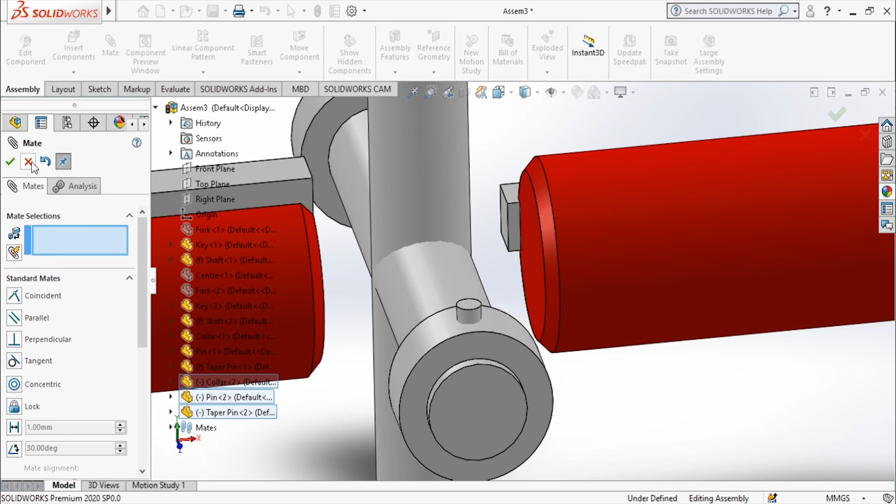I'm going to add the mate now itself and later I'm going to unhide everything. And now I'll insert the taper pin. Okay, and I'm going to make this taper pin fixed so that it does not move.

And I'm going to unhide all the components which we have hidden. And now you can see the assembly is done.